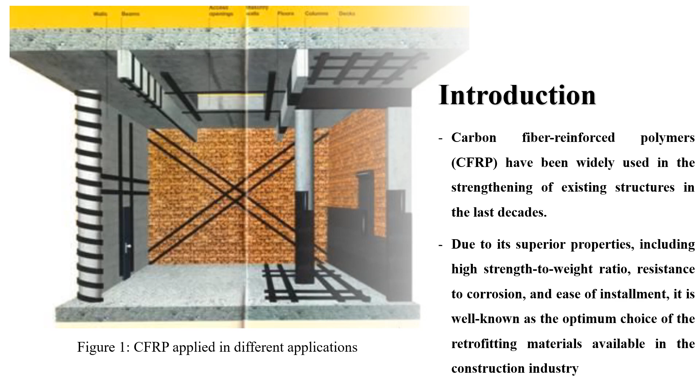CFRP can be applied to the soffit of beams or slabs by several techniques, of which the most common are externally bonded reinforcement, where CFRP sheets or plates are adhered using epoxy to the concrete substrate. The other method is near-surface mounting, where FRP strips or rods are bonded inside grooves in the concrete cover.

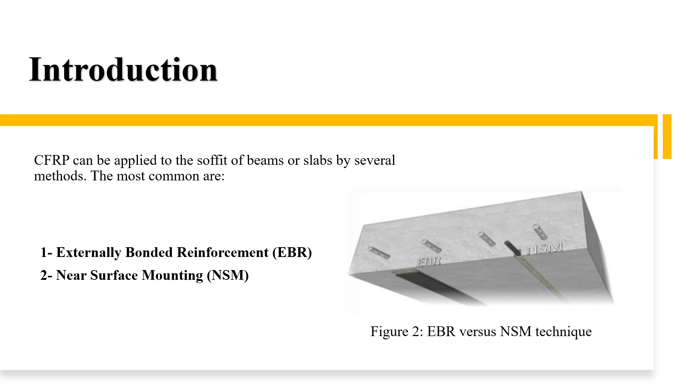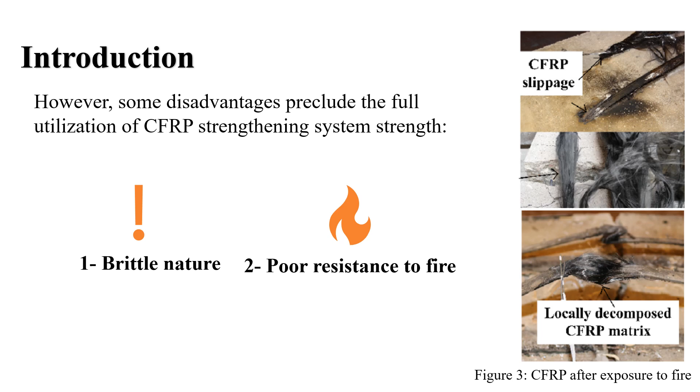However, CFRP strengthening systems have some disadvantages. First, since they are linear elastic materials, they fail in an abrupt and brittle manner. Second, they have poor resistance to fire, as can be seen in the displayed figures.

For example, the bond between the FRP material and concrete is highly degraded at increasing temperatures. Also, the mechanical properties of both the FRP and the bonding matrix are decreased due to the softening of these materials at their glass transition temperature, Tg, which is typically between 45 and 120 degrees Celsius. The matrix will decompose at temperatures of 300 to 500 degrees Celsius. This means that the FRP strengthening system will be subjected to failure in incidents of fire.

Therefore, studying the performance of FRP strengthened structural members under elevated temperatures is crucial in order to propose safety guidelines and to develop effective fire protection systems.

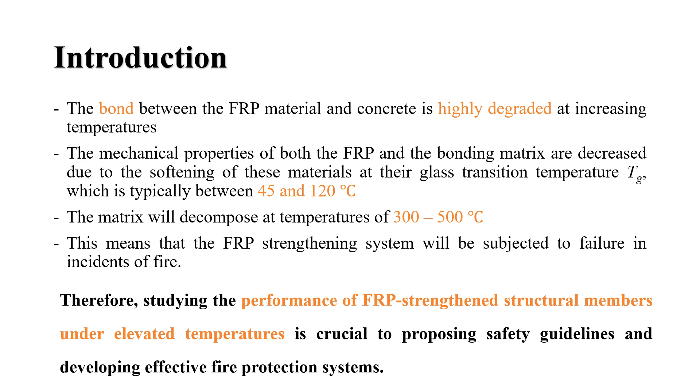The objectives of this research are to create a finite element model that can predict the behavior of CFRP strengthened RC slabs under fire exposure using two different techniques, the externally bonded reinforcement and the near surface mounted technique, and to validate the results of the finite element model with previous published experimental data.

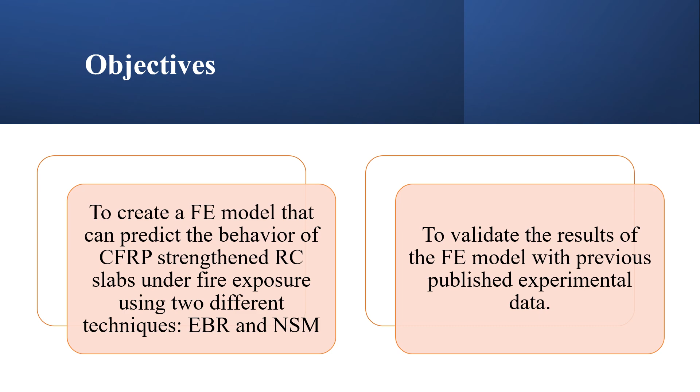Three-dimensional finite element models were created using the simulation environment ANSYS version 19.2. The geometrical configuration and material properties are the same as the ones tested by Azevedo et al. in a previous experimental investigation, where they tested a control slab, an externally bonded slab, and a near-surface mounted slab under 4-point bending test at room temperature.

They also subjected the soffit of another strengthened slab to ASTM E119 standard fire. As we can see in figure 4, the cross sections of the tested slabs. Figure 5 shows the developed finite element models for the strengthened slabs.

As we can see in figure 5c, a quarter of the slab was developed to reduce computational time, and boundary conditions were applied in the symmetrical axes. Figure 6 shows the test setup in the experimental investigation.

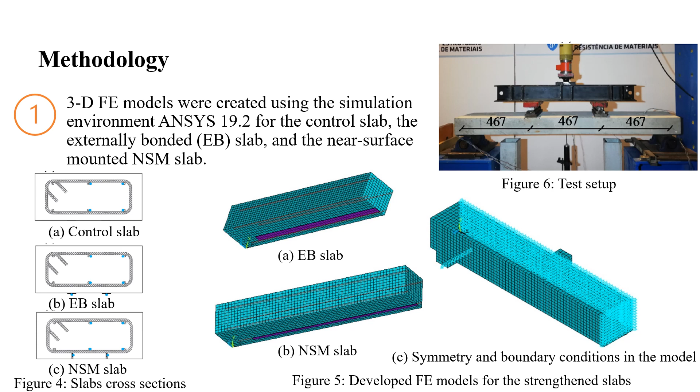The models were analyzed under ambient temperature to validate their structural response with experimental results. The load versus deflection behavior of the three finite element models was validated using the published data by Azevedo et al.

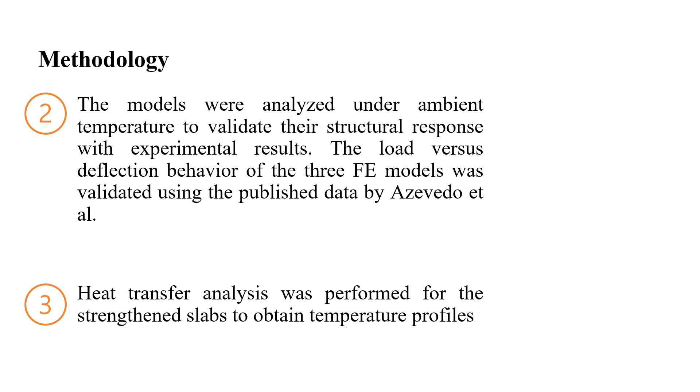Then heat transfer analysis was performed for the strengthened slabs in order to obtain temperature profiles. Finally, structural models were developed to perform the stress analysis of the strengthened slabs using the two different techniques, EBR and NSM, to compare the results with the experimental data.

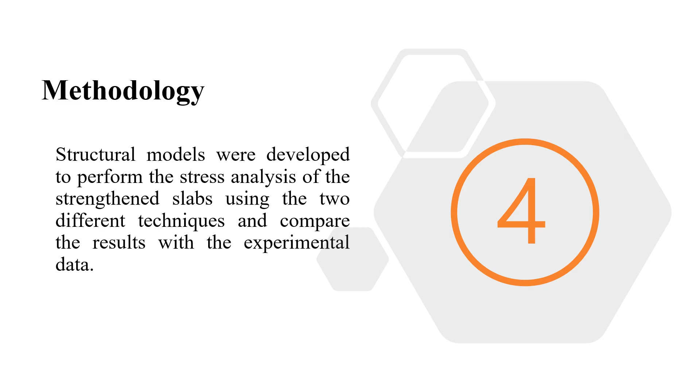Finite element modeling involves finding analysis results at all nodes of the elements that form the whole structure. Therefore, each material was defined using a suitable element formulation. For instance, in the thermal model, concrete was modeled using element Solid 70, an 8-noded linear brick element capable of transferring heat via conduction, convection, and radiation.

Steel reinforcement was modeled using a 2-noded truss element. FRP and epoxy were modeled just like concrete, using Solid 70.

For the structural model, in which stresses and displacements are found, equivalent element types were used. For concrete, Solid 65 was used, which is capable of simulating concrete cracking and crushing. However, FRP, epoxy, and the rigid plates were simulated using the linear brick element Solid 185, which doesn't have the ability of cracking and crushing.

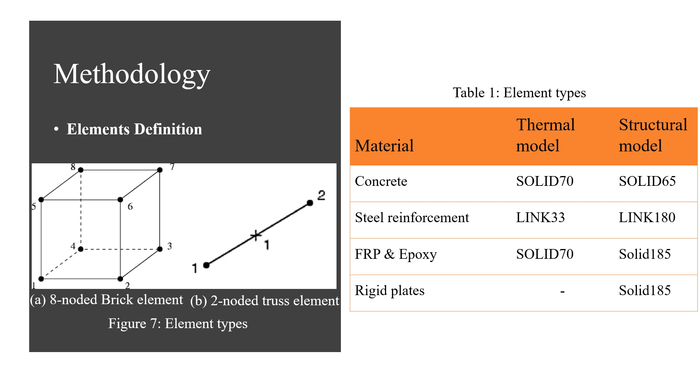In order to simulate the separation of the CFRP sheet from the concrete substrate, which is the typical failure mode of externally bonded reinforcement systems, Inter 205 elements were used along with the cohesive zone material model.

In this model, the bond stress is a function of the slip between the FRP material and concrete. The typical bond slip model starts with an increasing segment up to the ultimate shear stress and its corresponding slip, as can be seen in Figure 8a. After that, a softening response takes place until the maximum slip occurs. The Nakaba et al. bond slip model was assigned in this problem.

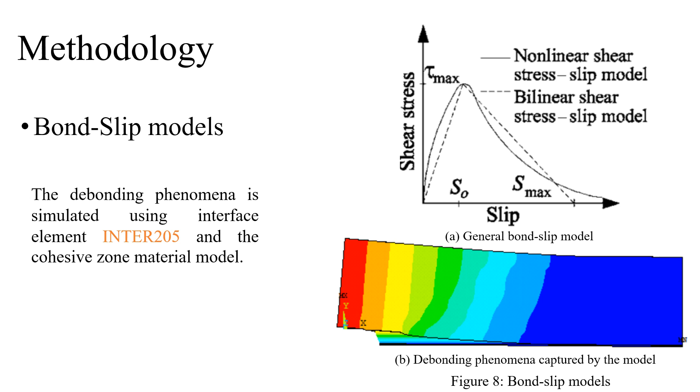The finite element model incorporates temperature-dependent material properties. These include both the thermal and mechanical properties of concrete, steel reinforcement, and CFRP.

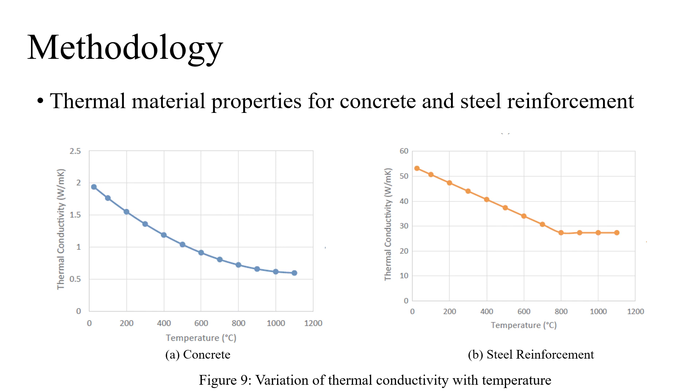Figure 9 shows the variation of the thermal conductivity of concrete and steel reinforcement with temperature. These material models were adopted from Eurocode 2. Similarly, specific heat and density of concrete and steel reinforcement were adopted from Eurocode 2, as shown in Figure 10 and Figure 11.

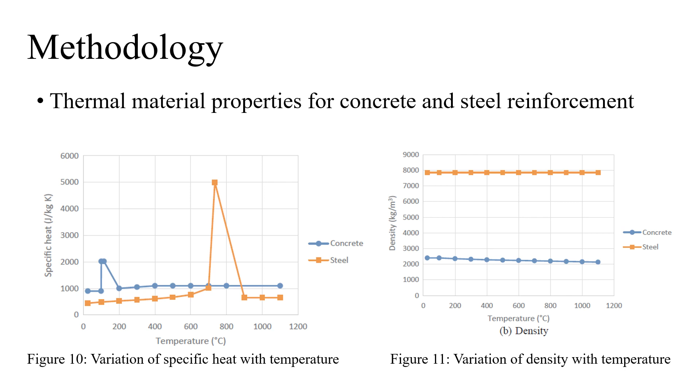Previous proposed models were adopted for the variation of the CFRP material property with temperature. In this study, the Griffis et al. model was used.

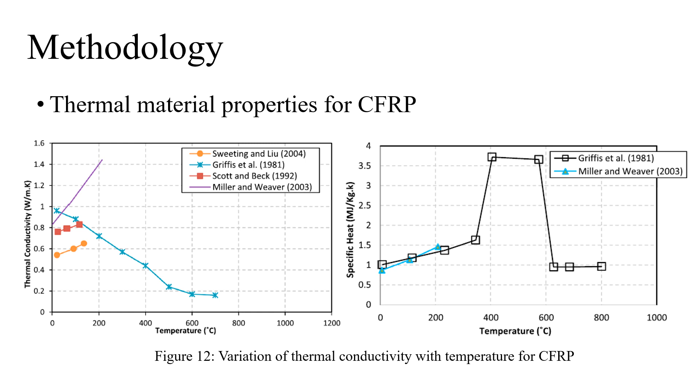The mechanical material properties include modulus of elasticity, thermal expansion, and stress-strain curves. For concrete and steel, they were also calculated using Eurocode 2.

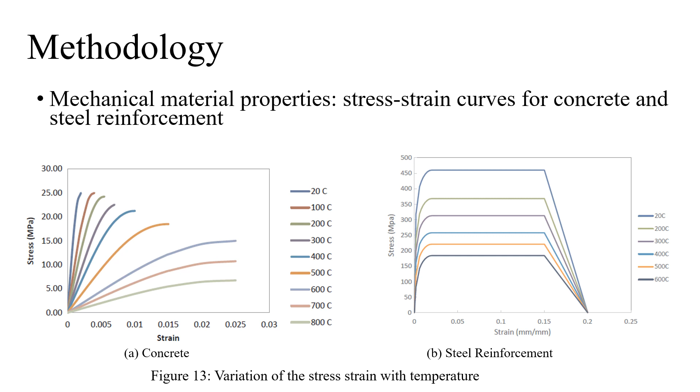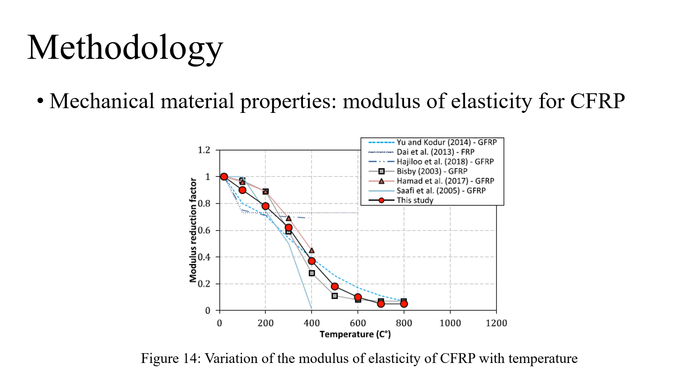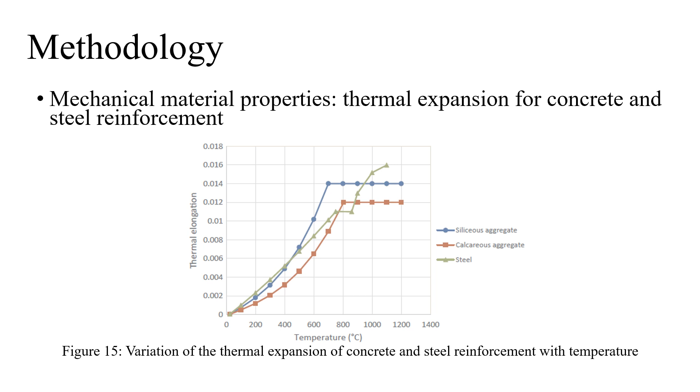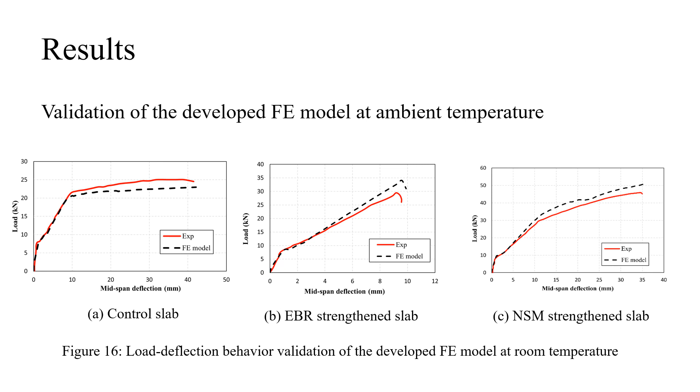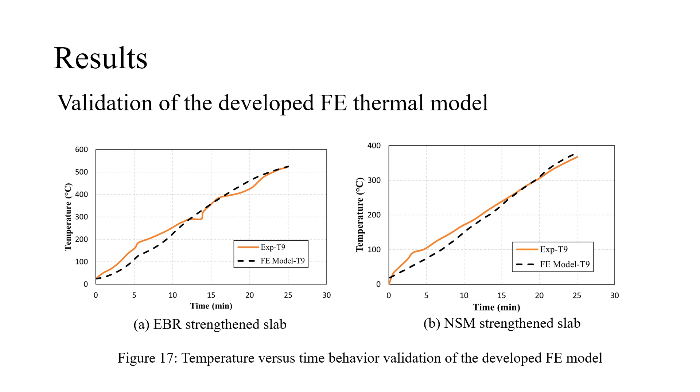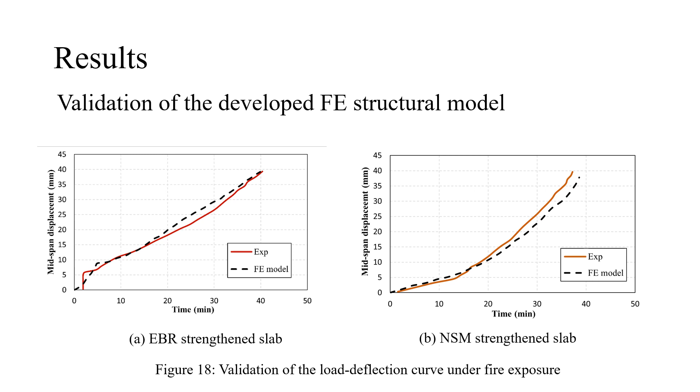Conclusions: The developed model predicted to a good extent the behavior of the slab from initial loading until failure under combined effects of static loading and fire exposure.

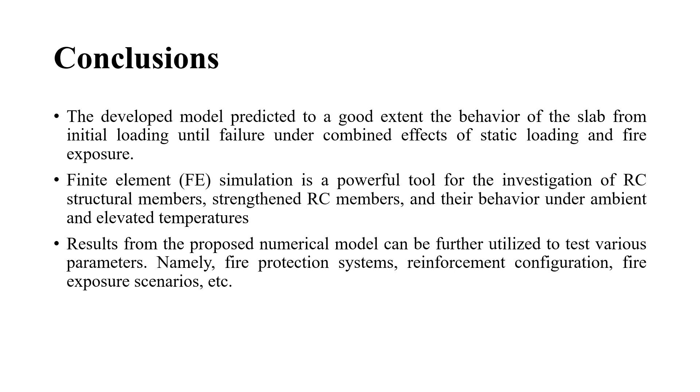Finite element simulation is a powerful tool for the investigation of reinforced concrete structural members, strengthened reinforced concrete members, and their behavior under ambient and elevated temperatures. Results from the proposed numerical model can be further utilized to test various parameters, for example, fire protection systems, reinforcement configuration, fire exposure scenarios, etc.